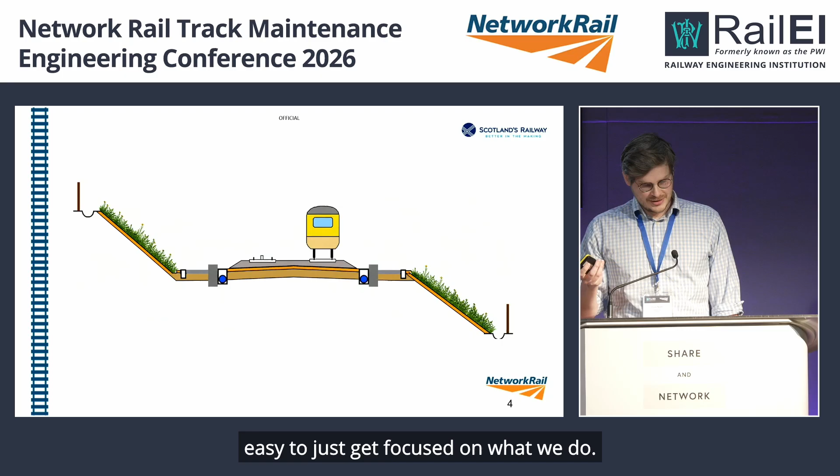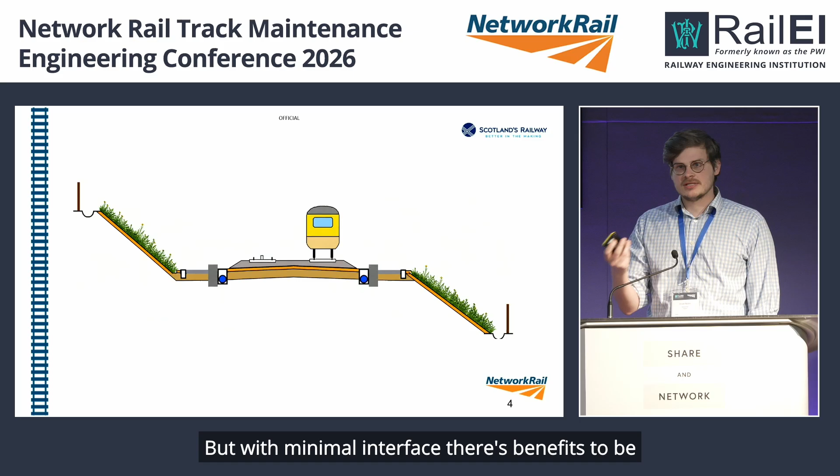So this is a very simple cross-section of a railway. So personally, even though I've held roles in off-track and track, I find it very easy to just get focused on what we do. You just speak to other engineers in your discipline, you work on your own thing, and so you should, that is your job. But with minimal interface, there's benefits to be gained from taking the blinkers off and looking at the wider system there.

So off-track, in a way, is quite simple. There's a vegetation standard that manages vegetation, there's a boundary standard that manages boundaries, and there's a drainage standard that manages drainage. You don't need to know these inside and out, you don't need to go to the standards briefs, there's just a requirement for an awareness of them.

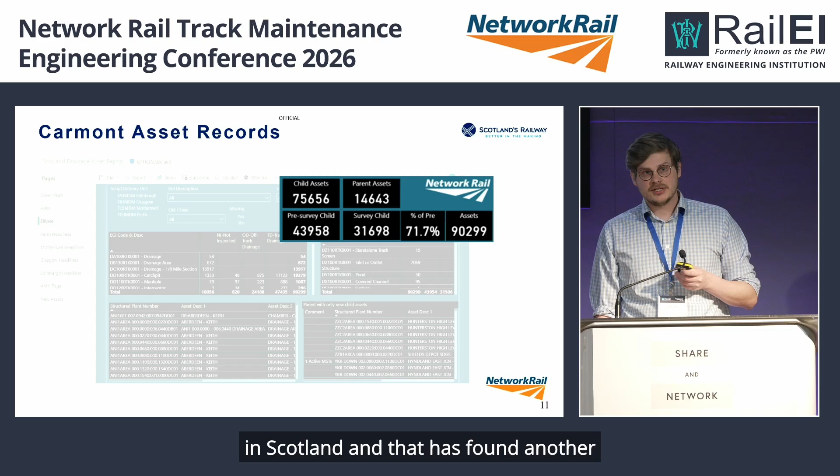And what you can see here is a Power BI dashboard for Scotland route, and the key information is up here. Before the survey, we had around 44,000 drainage assets in Scotland, and that has found another 31,000. So our drainage assets have increased by 70% in maintenance. We've got one guy to carry out all this extra work and extra inspections, so he's busy.

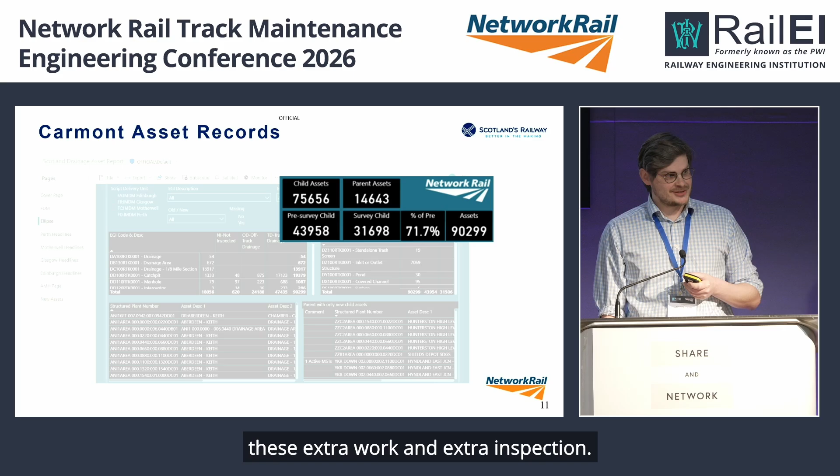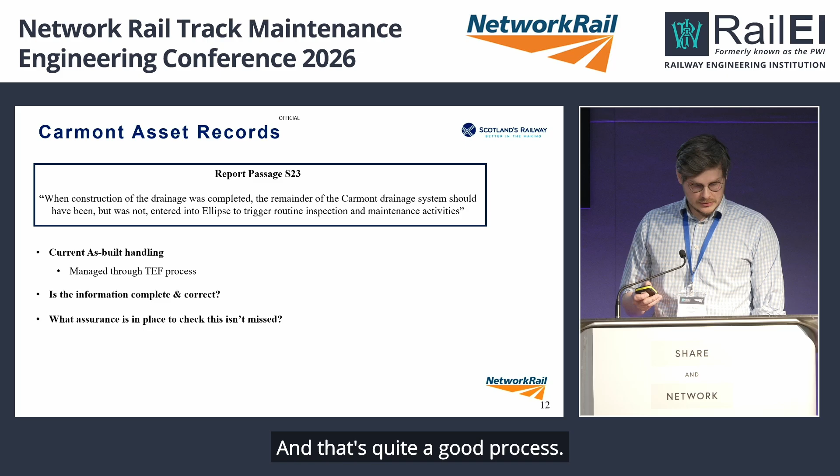So the current as-built handling, I think my batteries are running low, is managed through the TEF process. And that's quite a good process. It's quite robust. We have dedicated staff in the DU to deal with that. The deliverers have staff as well. So we're quite happy with that process and how everything is getting uploaded now.

Is the information complete and correct? Generally, yes. Sometimes there's optional information that isn't required but for completeness we would like, that's sometimes missed, but generally it's pretty good. But then when you look at the assurance of that process, it's solely reliant on one member of staff in the delivery unit, our system support.

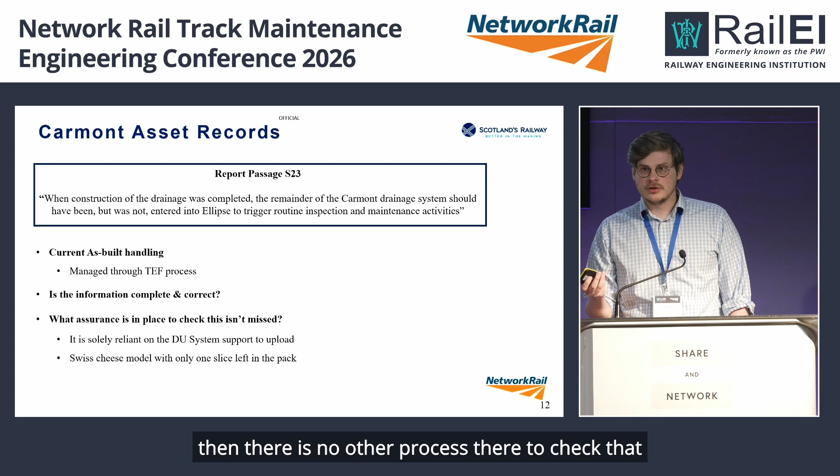For us, it's Alan. Now, Alan is great, but if he's off, if he's on holiday, if he misses an email, it goes to the junk folder, then there is no other process there to check, that will be gone and that asset is not recorded. So on the Swiss cheese model, we've just got one slice left there, and it is Alan, and it will be the same for yourselves.

So that got me thinking about how we work in track. In track maintenance, how are the current as-builts handled? So we don't do large-scale works in track maintenance a lot, but we do some. We did 2.10s, associated IBJs, changing stretchers from fixed to adjustable recently. And there are no as-builts. There is no AMP process for this work.

We're doing it ourselves. The work orders we put in do not update Ellipse, so nothing's getting changed there. We need to do bulk track update forms and send that to our system support, which is very rarely done. And for changing assets, we just have to send emails to the system support. Again, if you're changing an IBJ from a site-built IBJ to a factory glued, or your new stretcher bars, etc.,

changing position of them, then that is not getting captured in Ellipse, and it's not going to cause an incident like Carmont probably, but it might cause more scoping shifts to be required because you've got poor data quality. It might cause jobs to fall down on site because you've not got the right information during the planning stage.

Yeah, so the information, is it complete and correct? Depends. A lot of this is getting missed. And assurance, there is no assurance for this. There's not even the AMP process. So yeah, I think there is an area for us to improve on in maintenance there. One of the ideas we had looking at this was integrating systems, and that's a way to bring this together for improvement.

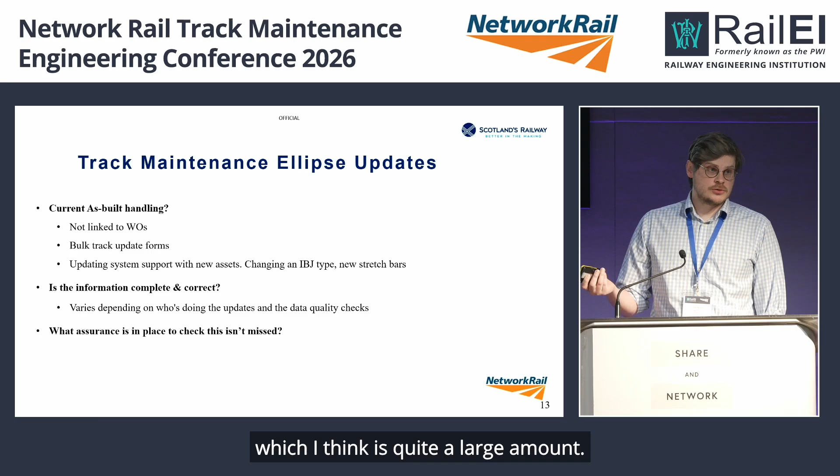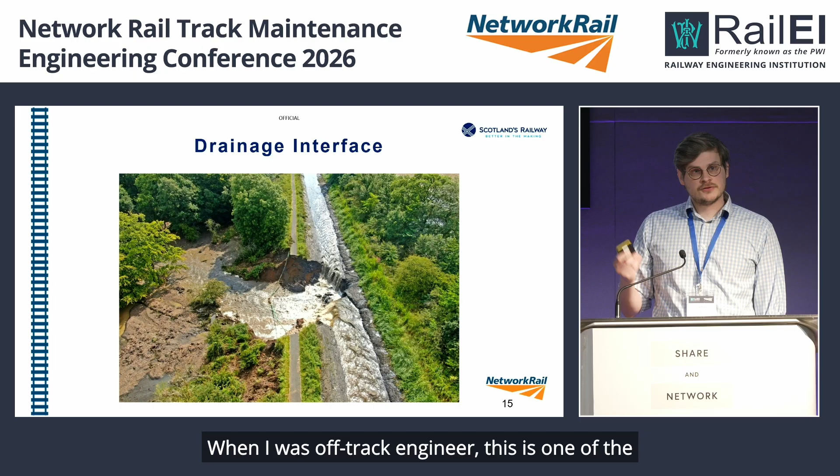Okay, so moving on to the direct interfaces, drainage. When I was off-track engineer, this was one of the major interfaces I had with drainage. This is the Union Canal between Glasgow and Edinburgh. It washed out and it took away a big chunk of the track with it. Now, this isn't something that we're going to deal with day to day, and it's very difficult to manage that.

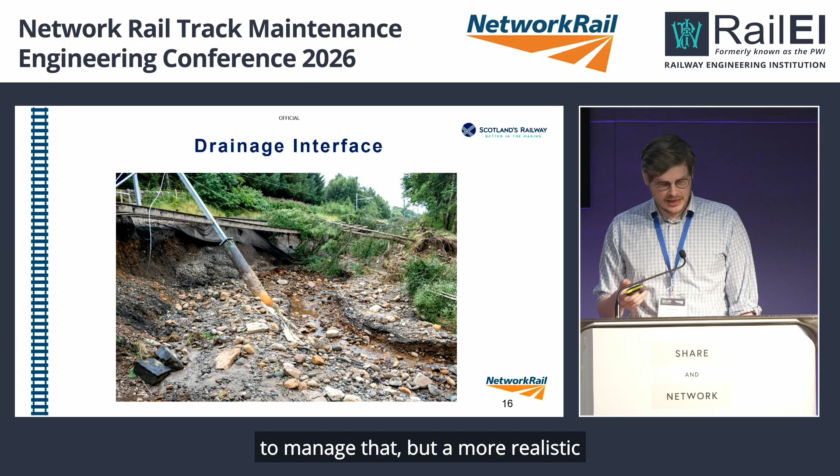But a more realistic example I've got shown here. So this is Shotts Golf Course, a golf course in Scotland, I know, but it is one of our most difficult drainage management sites.

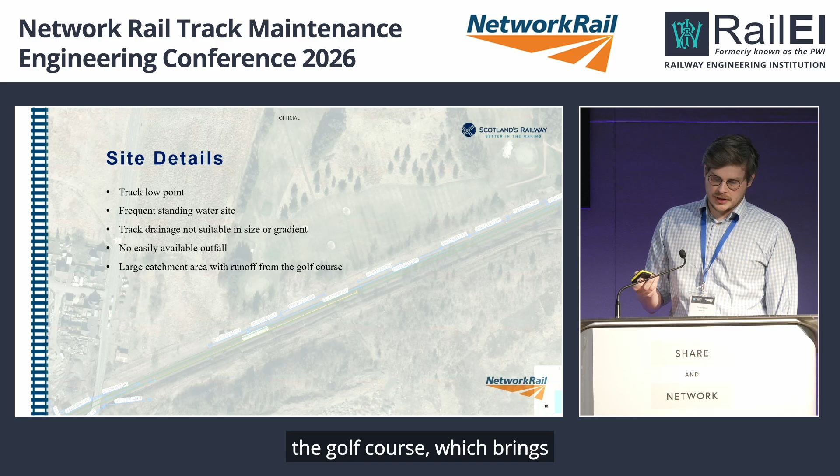So the track's the lowest point. It's a frequent standing water site. The drainage isn't suitable in size or in gradient. There's no easily available outfall to reach. It's a large catchment area with a lot of runoff from the golf course, which brings a lot of sand and silt into the railway.

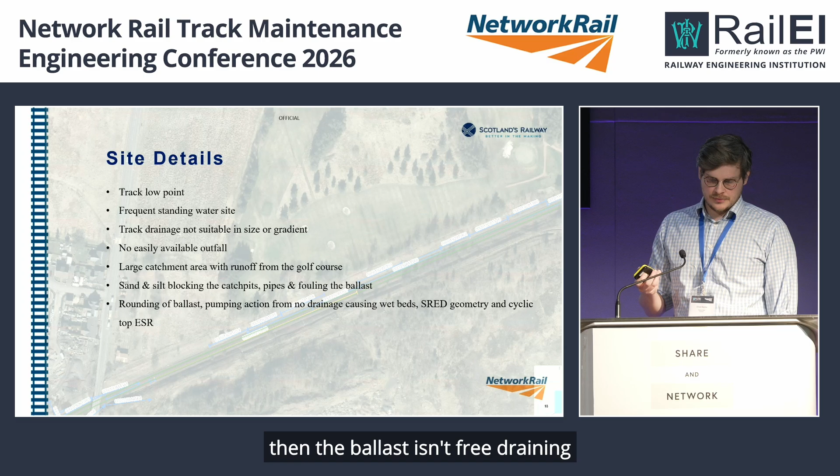That blocks the pipes, fouling the ballast. Ballast gets rounded, you have the pumping action, and then the ballast isn't free draining anymore, causing wet beds. It's a super red geometry site. There's cyclic top, which we've got an ESR TSR on for at the moment.

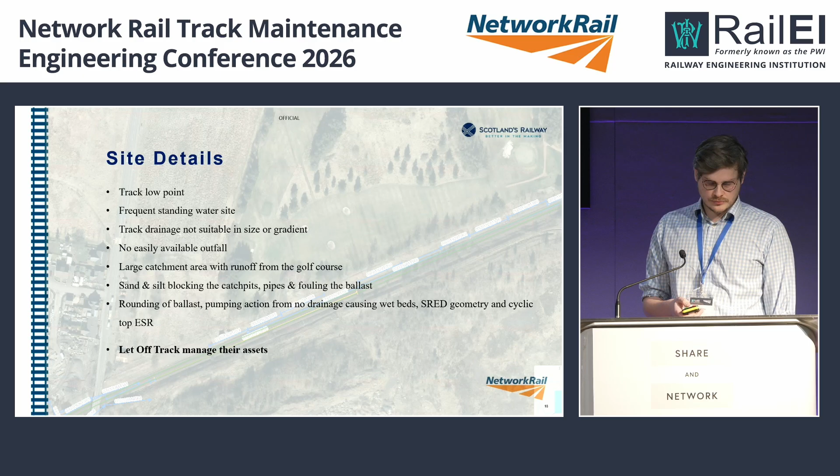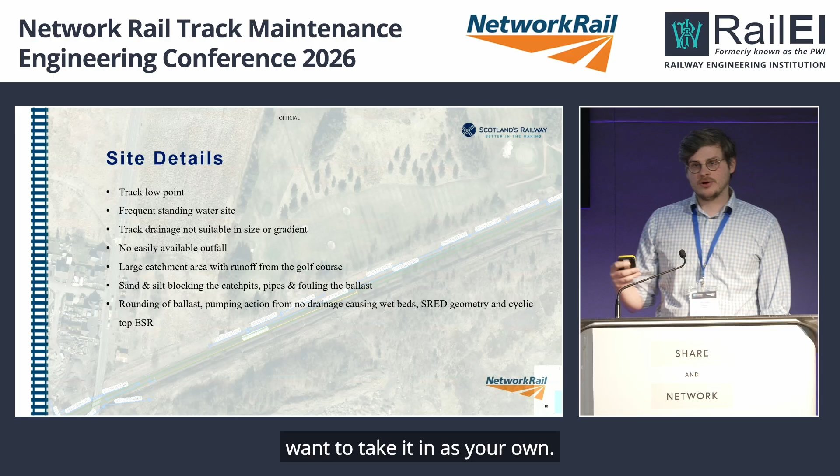So the main learning point from this is, even though I've been in off-track, when drainage issues start to impact track, it's easy to want to take it on as your own. So we put the walls up and say right, we're taking this over now, which is what we did here. I was arranging site visits with the off-track RAM team, not involving our off-track department. I was taking on arranging the Vactor, the pumping plans, the enhanced maintenance regimes of the drainage.

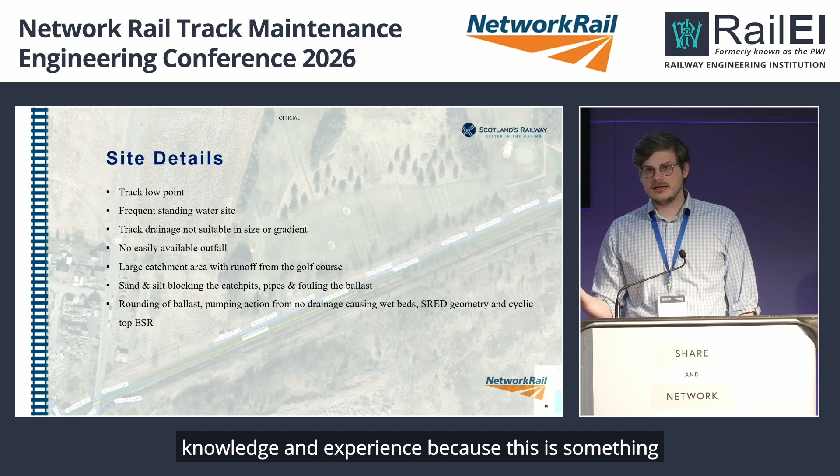So my main advice here would just be to really bring in the off-track team and utilize their knowledge and experience, because this is something that they deal with a lot. Their job is to manage the root cause of a lot of our problems. So we need to interface with them to make sure that that's happening. So let them manage their asset and support them in the best way we can.

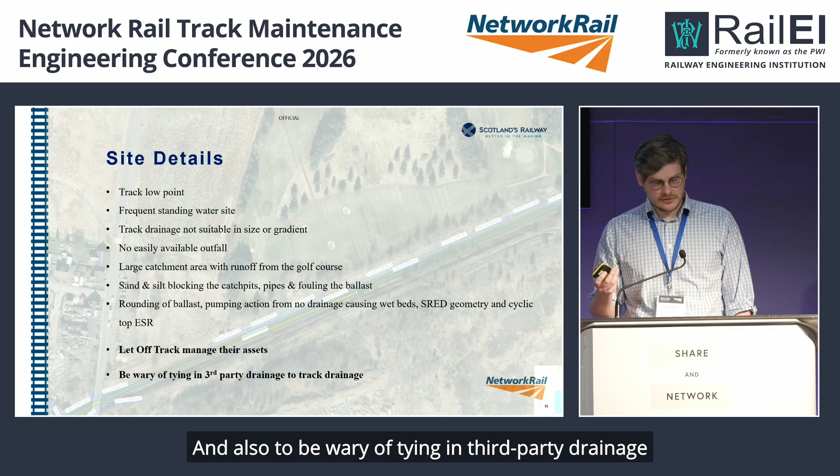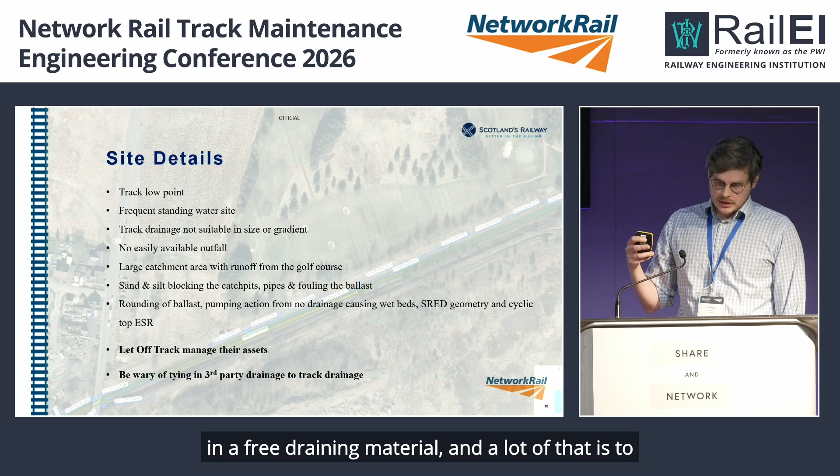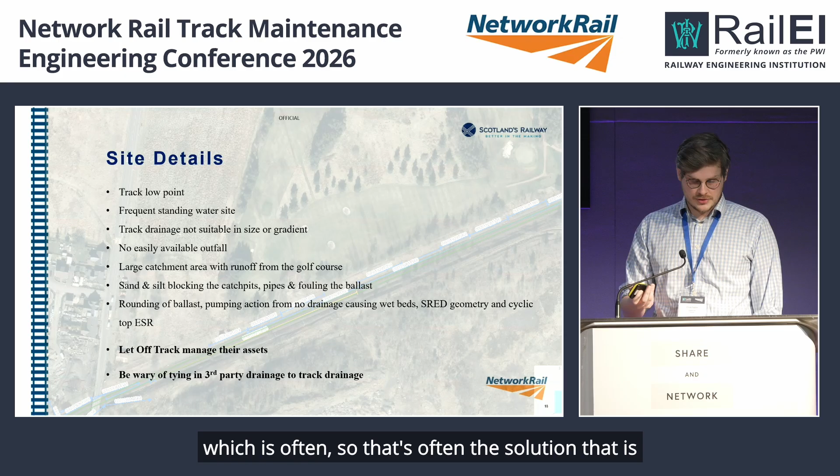And also be wary of tying third-party drainage into track drainage. As we know, track drainage is often perforated with a geotextile, sitting in a free draining material. And a lot of that's to keep out fines and silt and sand. So if we put third-party drainage straight into it without having the gradient for it to be self-cleaning, then that blocks up very quickly and requires enhanced maintenance, which is often the solution that is suggested during renewals for these sort of problems.

Okay, next up, vegetation. Firstly, I want to speak about leaf fall. So, the off-track have a vegetation management strategy, and it does look at track criticality, but they mainly look at the track category. There is an option for you to feed back to them about operational risk and operational capacity, and where tracks may not be high track cat, but it would be beneficial for them to move up their clearance enhancements. And feedback about areas of poor adhesion and where the railhead treatment train is affecting your access.

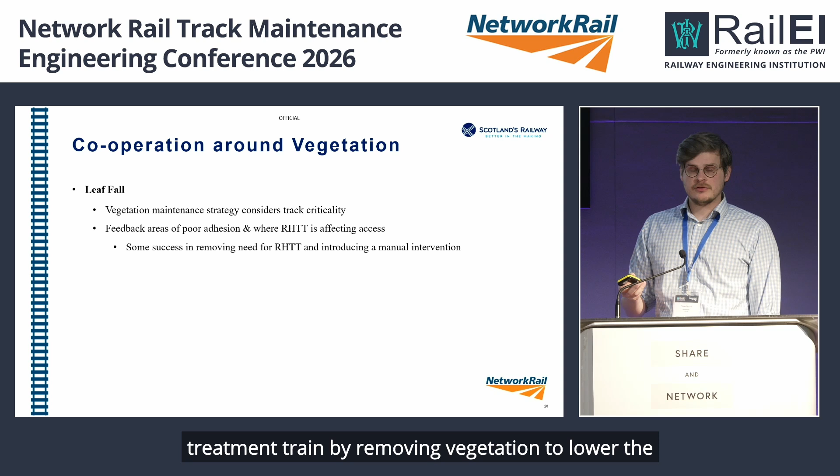So, it depends on the area, but we've had great success in removing the need for the railhead treatment train by removing vegetation to lower the adhesion risk, and then introducing manual intervention, be it MOMs or our own staff, and then depending on the pathing of the RHTT, we'll be able to move that out of the way to not affect our autumn access.

Next up, invasive species. As an off-track engineer, it's great to see track people engaged and feeding back to you. Invasive species are often right in your face, so it's great to feed them back. I would say check the hazard directory before you do. Check the pack when you're working, when you've spotted them. If it's in there, it's probably getting treated. If it's not, then great, let's feed it back.

DDDs, so dangerous trees. Again, an awareness that trees, although they are lineside, they can encroach into the track support zone, and everything that's in the track support zone should be of our concern. During a recent storm event, towards the end, we were just wrapping up really, and we got a report of a small tree that had fallen over, leaving a small hole behind. It was near the depot, so a few of us went out with some shovels just to fill it in as a short-term fix.

And then when we got there, the shovels weren't big enough. So yes, the tree's fallen, it's taken away the ballast shoulder, it's taken away the support from the sleeper ends, and it's put the troughing route into the hedge.

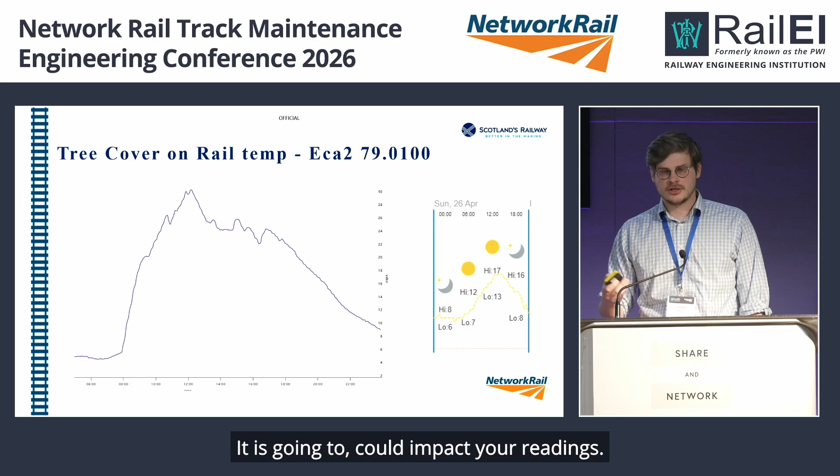So large-scale vegetation removal is something you need to be aware of for raising the risk on CRTs. Small-scale sites, well, it's not going to change the stress in the rail. It could impact your readings.

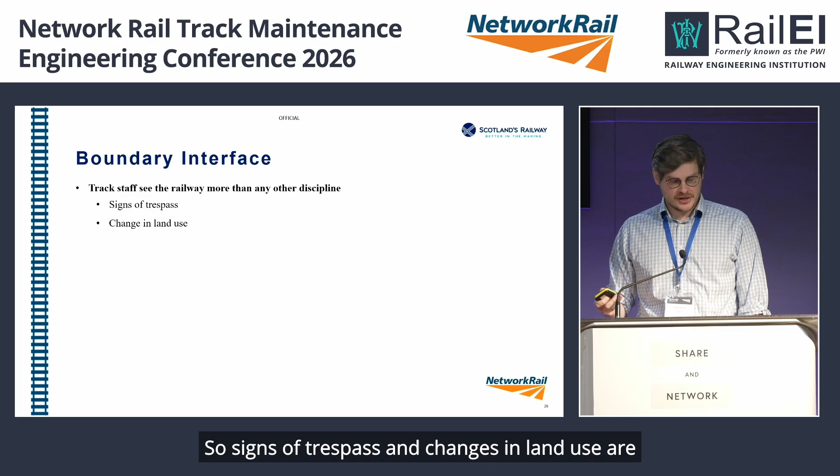Okay, and finally, we're going to look at boundaries. So, as a track discipline, we see the track more than anyone else. Overhead's always looking up. S&T are always looking at the cabinets or at the floor. We cover smaller areas than the off-track do, so we've got the best local knowledge. So signs of trespass and changes in land use are things that do affect off-track's frequency of inspection, so any of these things they want to know about.

Animal incursions, it's often a joint response where that falls between the two disciplines. Some areas have an off-track on call, some don't. It's just whoever's closest to respond. So when I was the off-track engineer, one thing that was raised through our union reps was an uncomfortableness working around animals. So they do a lot removing animals from the line or walking the fence lines for their inspections.

So there were no courses available, so we managed to connect with a local farming college, the SRUC. They were really great. They built a course for us that we got the guys to attend. Sorry, guys and girls. It was half with the animals, half in the classroom. It cost £400 for 20 people. That's not each, that's for 20 people. And yeah, it's a brilliant course.

That was then expanded, mainly due to we had a track staff on call gone to remove a cow from the line. It chased him rather than him chasing the cow, and he went down the embankment. So after that, we put our track on-call staff on it as well. So yes, it has been expanded. Yes, spend time on the farm and animals.

I think it's actually been brought into the training catalogue now, and it is just done classroom, which is a slight shame. But just an awareness that if there's things like this that there isn't training available for, you can reach out and you can look to create these yourself or see what's available in the training catalogue.

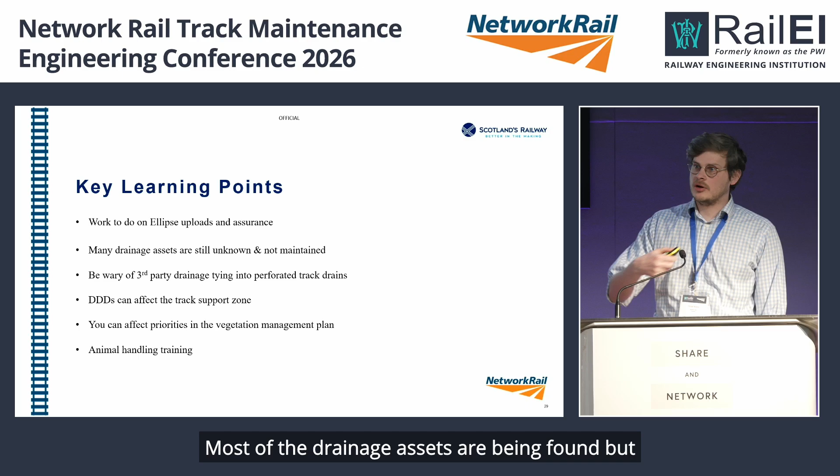So I'll just leave you with key learning points that we've got from the slides I've talked through today. Some work to do on Ellipse. Most of the drainage assets are being found, but they're not all there being known and maintained quite yet. And yeah, the interface with off-track there can affect the track support zone, and their plans can be influenced by us.